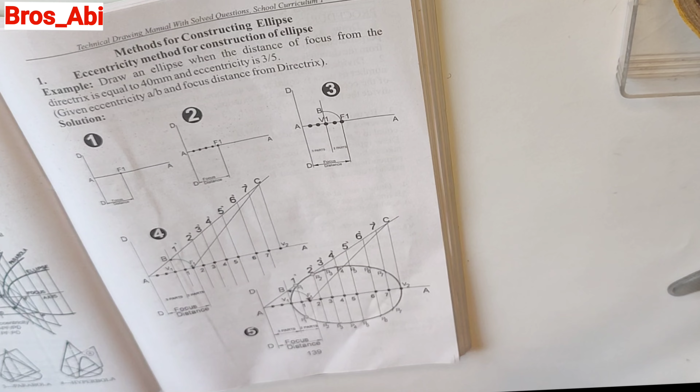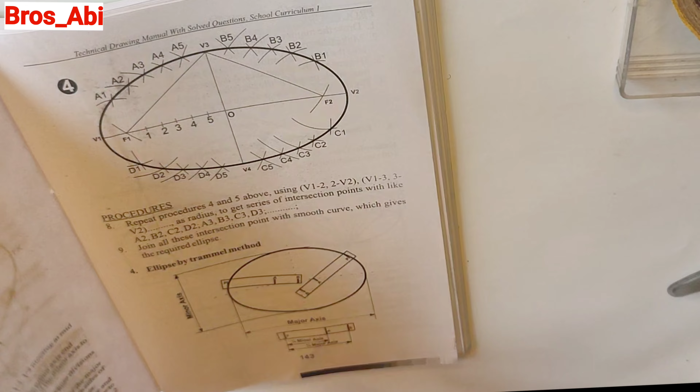All right, let's look at different methods of drawing an ellipse. I'll be using this technical drawing manual with Solved Questions, School Curriculum 1 by Ike Ajayi, looking at the eccentricity method, the concentric method, the ellipse method, focal point method, and trammel method. I'm going to start with eccentricity and trammel, then go through the others. After each video, I'll put a practical question. So now let's look at this.

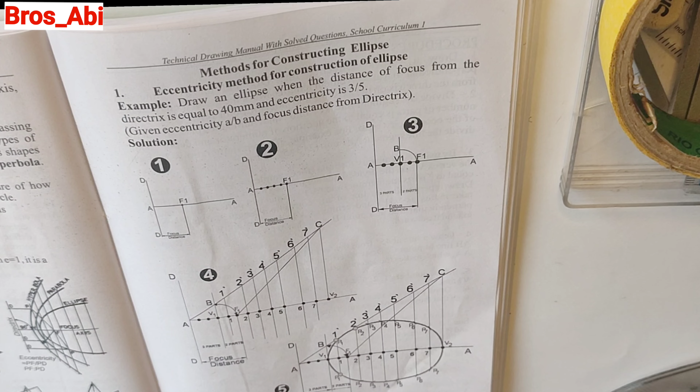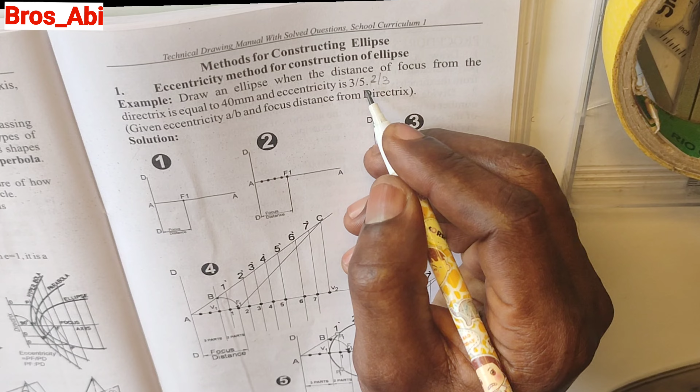It says draw an ellipse when the distance of focus from the directrix is equal to 40 millimeters and eccentricity is 2 over 3. So given eccentricity and focus distance from directrix, let's draw the ellipse.

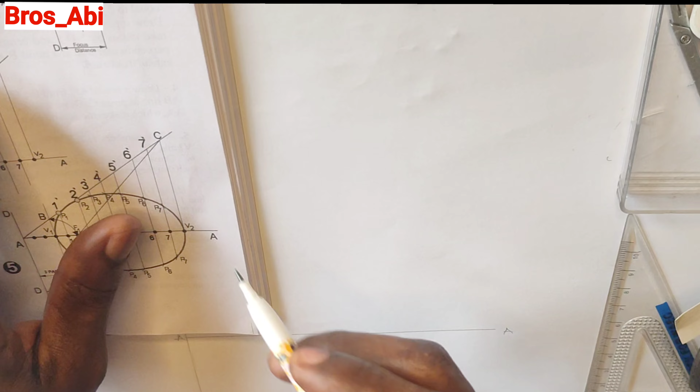The first step is to draw the axis AA. This is called the directrix - this line DD is the directrix. From this point toward this side is our axis. Now put the focal point. The focal point is 40 millimeters away from the directrix, so measure your 40 millimeters.

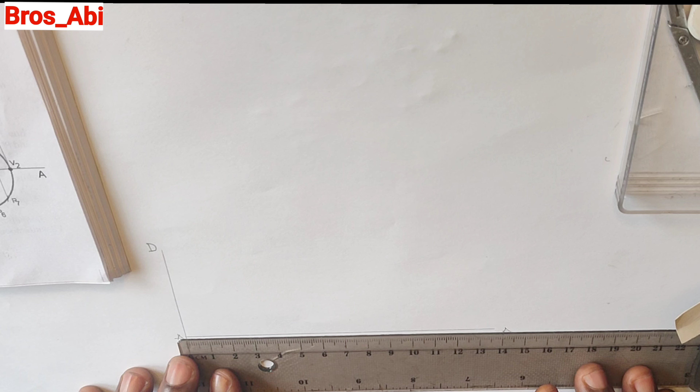I'll be drawing it with a 2D board and also without, using only our sketch pad. This is my focal point, F1. Next is to use our eccentricity to get our vertex point.

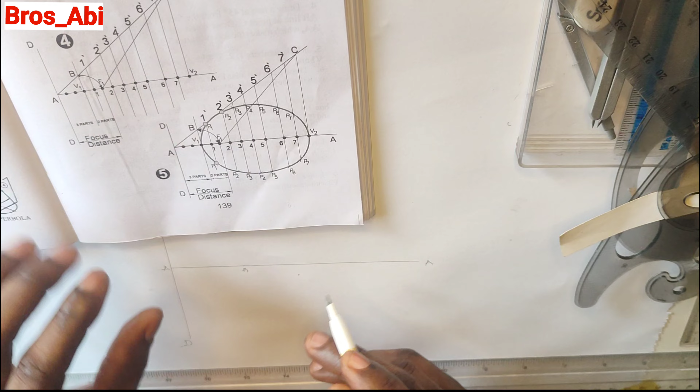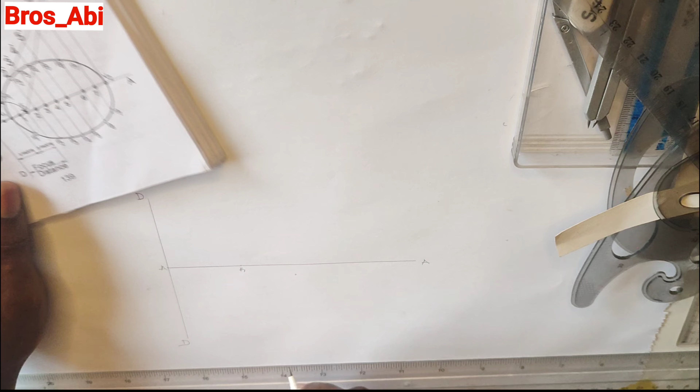Given that the eccentricity is 2 over 3, we add 2 plus 3, which is 5. So we divide from point A to F1 into 5 equal places. If from A to F1 is 40, dividing by 5 gives us 0.8. So I'll divide this from A to F, measuring 0.8 each time.

This is 1 - 0.8. The next is 1.6. After 1.6, we have 2.4. After 2.4, we have 3.2. After 3.2, then we have 4.0. We've divided that into 5 equal parts.

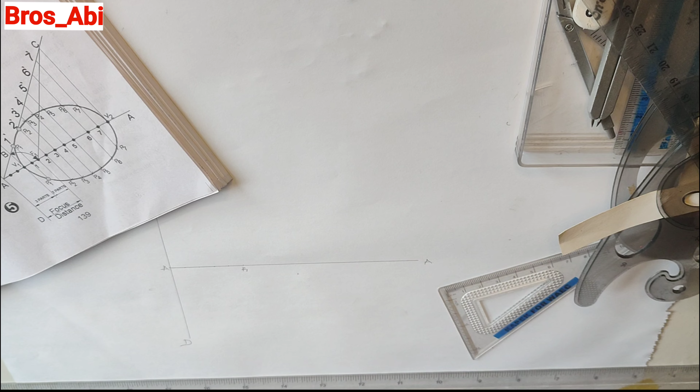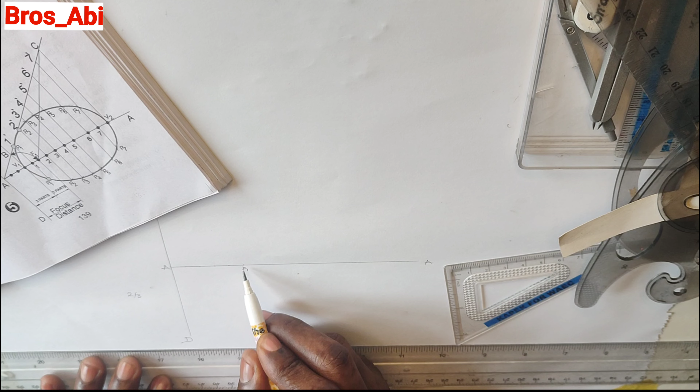So the next to do now is from A, we use the eccentricity of 2 over 3. The numerator will be the distance from F to the vertex, while the denominator will be the distance from A to the vertex. Now let's count 3 points towards this side - 1, 2, 3 - which is here. This is our V1, our vertex point: 3 points toward the directrix and 2 points toward the focal point.

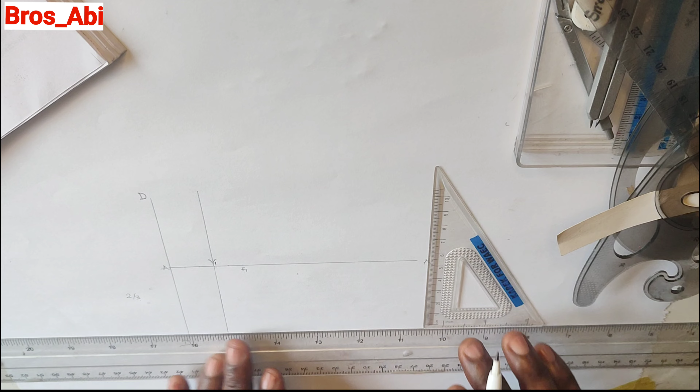With this now, the next step is to draw a vertical line across this vertex point - you can see me placing my set square on my T-square. Then we take our compass, put it at F, and take the distance from V. With this radius, I put it at V and mark.

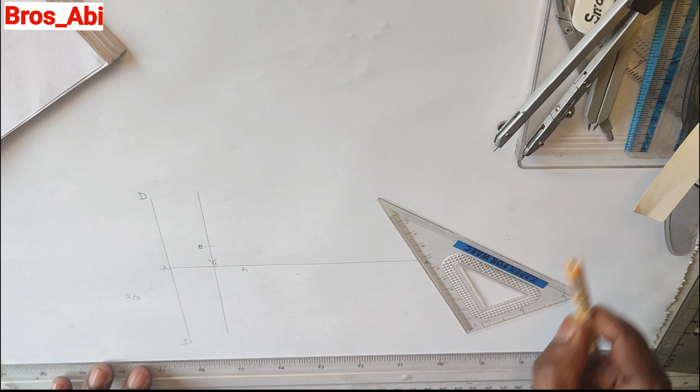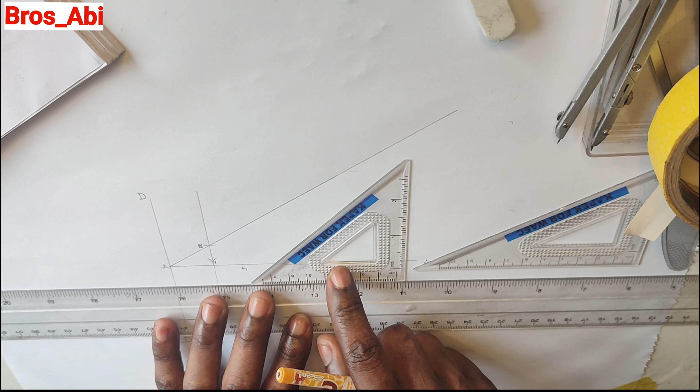Now what's next is to take a 45 degree set square and draw a line from focal point F1 at 45 degrees. I'll finish that with this.

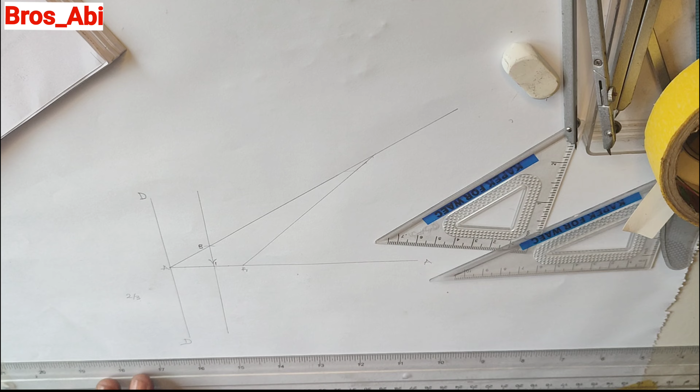So now where this line from the focal point is touching the line from point B, we're going to drop it down. We call this point V2 - vertex point 2. This is vertex point 1.

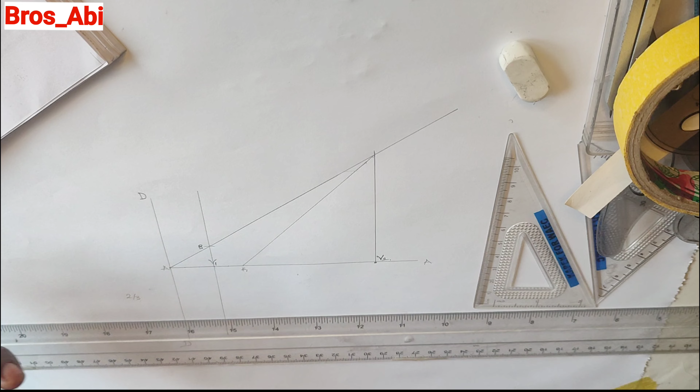So what we'll do next is from vertex point 1 to vertex point 2, we'll divide into different numbers - it might be equal, it might be different dimensions. From V1, my dimension is 8.9, so I can use 1, use 2.5, use 1 again, randomly 6, 7, and so on like this. I'm going to make from here to here be 1, so it's the same dimension as the first part. You can make it equal, or any part you want.

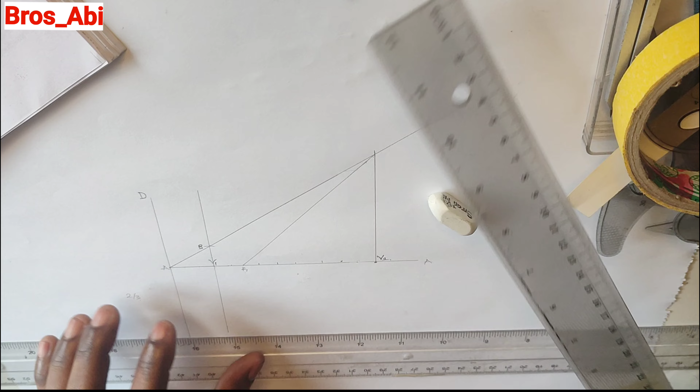So all you do now is from all those points, put a vertical line, parallel. So now where these parallel lines cut this line A through B, we start labeling it: point 1, point 2, 3, 4, 5, 6, 7.

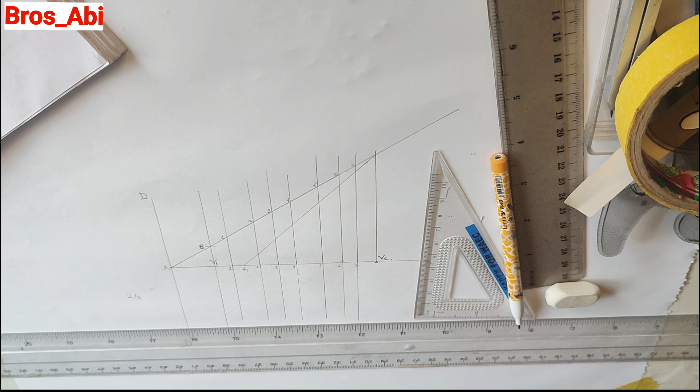What we're now going to do next is take our compass, put it at point 1, go to 1. Then come to the focal point, mark here. Then put it at point 2, go 2 to 2, come to focal point, mark. Put it at 3, go 3 to 3, put it at focal point, mark. Put it at 4.

Come to focal point, mark. Put it at 5, extend to 5, put it at focal point, mark. Put it at 6, extend to 6, put at the focal point, mark. Put at 7, extend to 7, put at F1, mark. So those are the points for our ellipse.

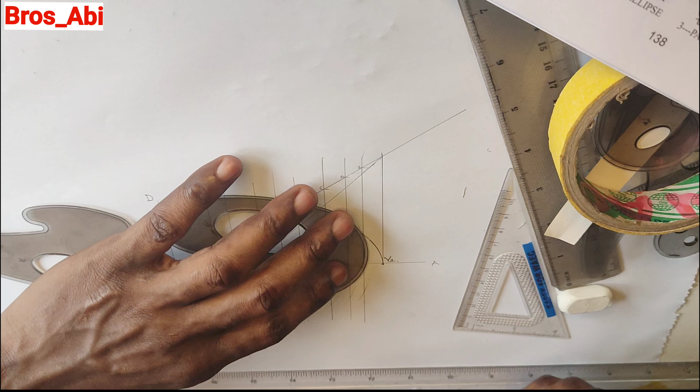So now we'll get our French curve to join all the points together. I think I found the best part from here to here - even if it's the first two, take it first. You see this part I use for this section, I'm going to bring it down here to also do this part. Let me take it to this part also, and see what I can achieve here.

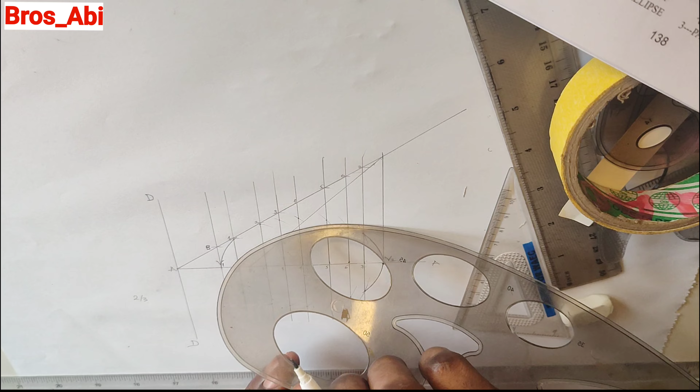This one, two, okay, it goes like this. And turn it to the other side like this. This part, let me see what I can obtain here. Okay, no, it won't go like that. Okay, I think it would go like this. Perfect, this two is good. So it's good to go. So I'm bringing it to the other side, this part.

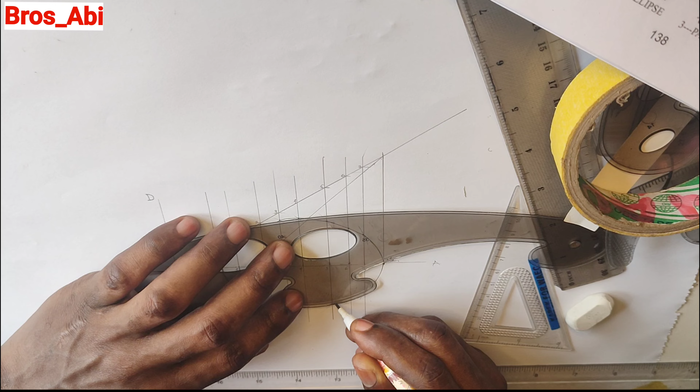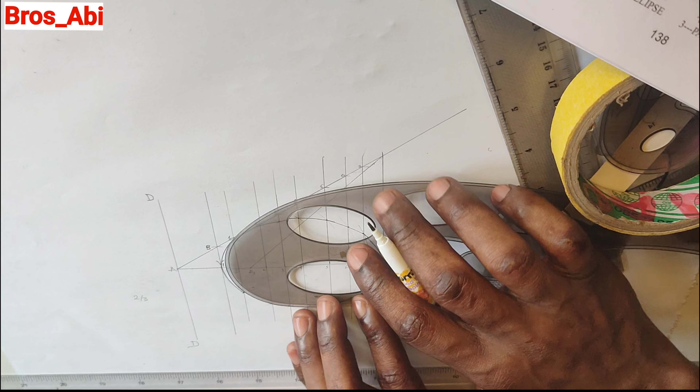Okay, seems something like this will be better. Good. So just turn it to the other side. Good, so let's see this part. Okay, this part also goes well from here like this to this part. Okay, so meaning we take it down like this, and here we go. Beautiful, now here is our ellipse using eccentricity method.

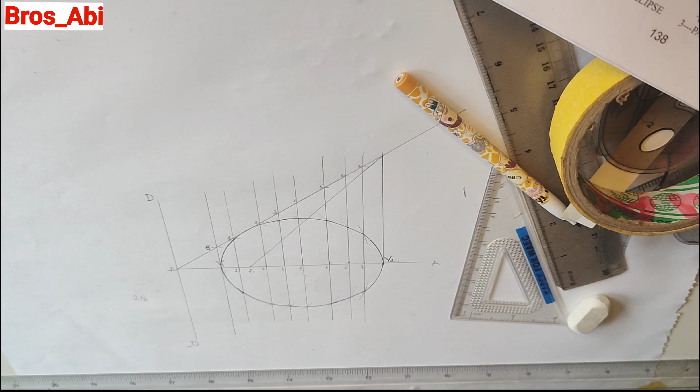All right, so now the next is for me to use set squares and other drawing equipment. If you're having only set squares, you can also use your set squares alone without your T-square to draw your ellipse.

So here we go. Now using eccentricity method, with just our compass and pencil, protractor, ruler, and set squares, we're going to draw the eccentricity method for construction of ellipse.

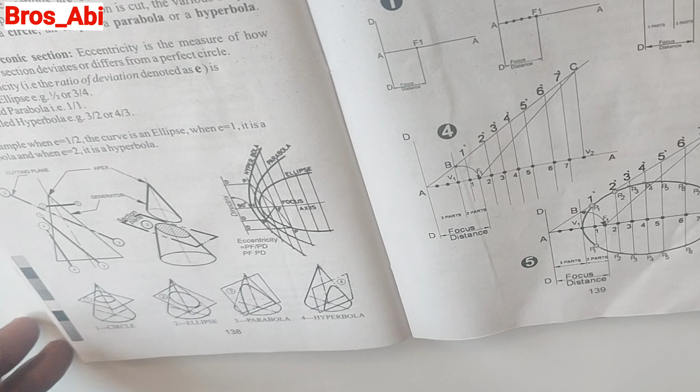All right, so what we do is now, at least, put your protractor to see that your ruler is well placed. As it is like this, it looks well placed like this. All right, okay, it looks well placed, and whichever way you place it will keep being on track.

So now draw your horizontal line, then your axis. Now you see this point here, 0, 90, set it on my straight line. My vertical line will be 90 degrees to the horizontal line. All right, so I can put my ruler like this and draw.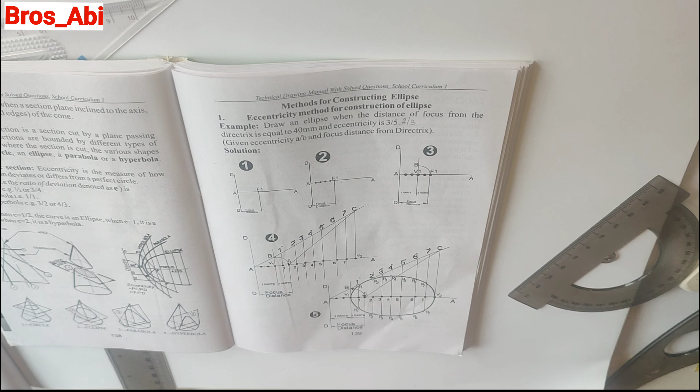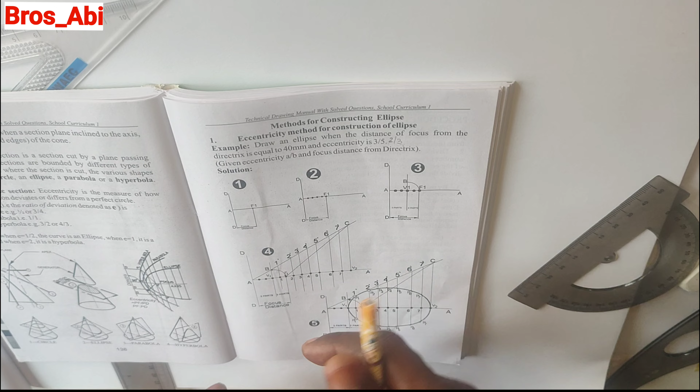Okay, good, I label these as my directrix, and here to here as this. The question says draw an ellipse when the distance of focus from the directrix is equal to 40 millimeter and eccentricity is 2 over 3. I said we are not using 3 over 5, because, okay, we can even use 3 over 5 at this point now. If we want to use 3 over 5, we'll still arrive at the same answer, so let's use 3 over 5.

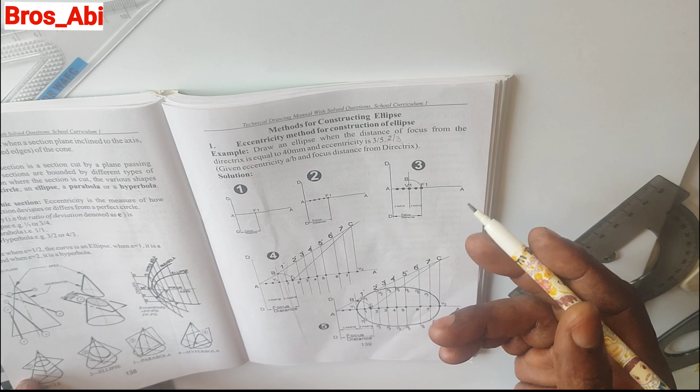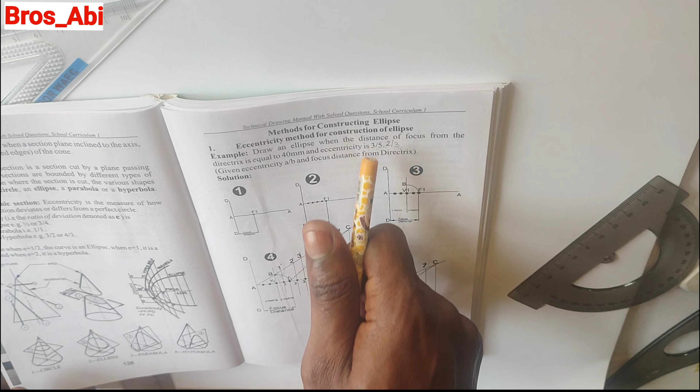Let's look at what the textbook, the value that the textbook gave, but that was not the value depicted in the drawing here. You can see from here, 1, 2, 3, 4, 5. They use 5, which is meant to be 8 if they are to use this ratio. So let's use ratio 8 now, 3 over 5, that's 3 over 5, which is going to be 8 when you add it together. So that will be 8.

So that means I'm taking my focal point 40, then I'm dividing into 8. That means I'll be using 5, 1, 2, 3, 4, that is 40 into 8 places, 5, 6, 7, 8, that's 1, 2, 3, 4, 5, 6, 7, 8.

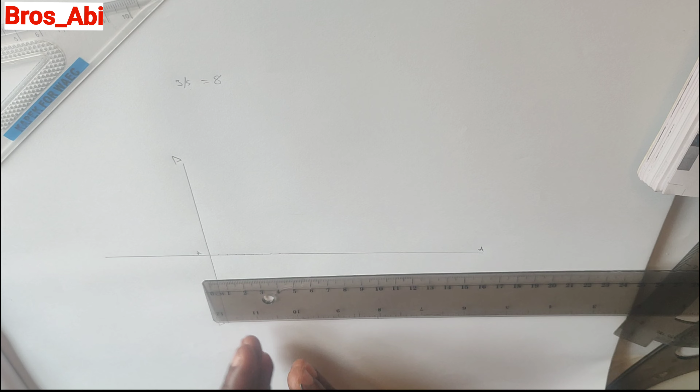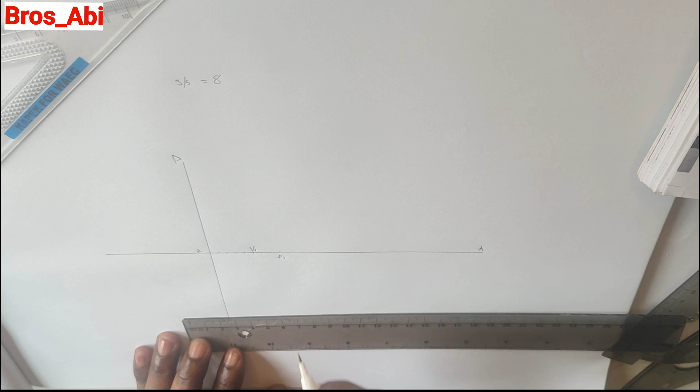And okay, now what next to do is draw a vertical line. Remember, we used to draw a vertical line. I put the 0 line on the straight line on the directrix. Also make sure that this straight line is also on the line here, and I put my ruler beneath. So and I remove this.

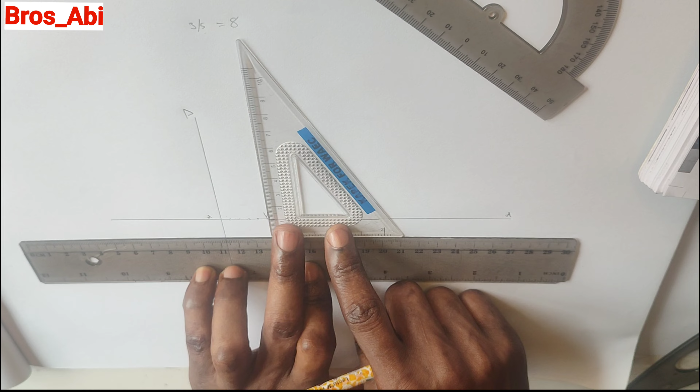So I'm not going to put this part now to draw line. I'm supposed to extend this line downward. So you can still put it again, 0 on this line, 90 degrees underneath.

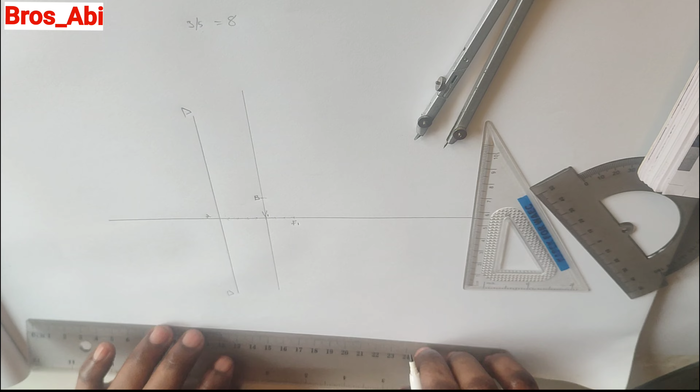Good, so now what next is to take the radius of F to V. Mark maybe here as point B. So now what we're now going to do next is to take a line from point B. As you can see, BV is equal to V1 F1. So from here through here, draw a straight line.

Okay, also from focal point, use your 45-degree set square to draw a straight line. So at this point, I'm going to check my okay, so I'm going to put this here like this and then draw. So then from that point also, I will drop it down from here. This is my V2, that vertex point, which is gotten through 45-degree to this side from the focal point.

What we are now going to do is, so as I've said, I'm going to divide this part into several halves. So I'm going to be using one, I'm going to be using the compass, 2, 3, 4. Now, but from here, I want to have also 1. I'm using point 1 from this side to this side. Then also from here, I use point 1. I mean, you use your call, French curve, to make it easier for me.

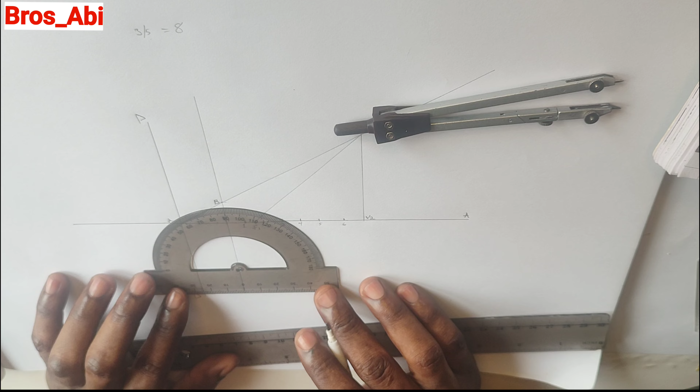Now this line, this division between V1 and V2, I said it can be random, it's not a must to be equal. When these parallel lines are touching this line AB, we label it 1, 2, 3, 4, 5, 6.

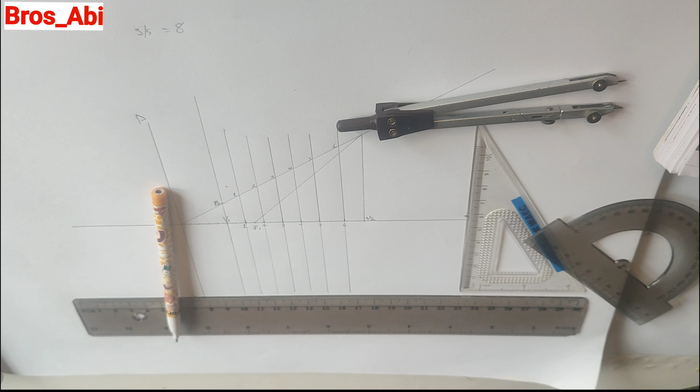What next is to take our compass, then we measure from 1 to this point here. Good, so we put it on F, we will mark 1, 1. Put it on 2, extend to 2. So we put it on focal point and we mark.

Okay, point, point, point, point, okay. Put it on 3. Okay, this is 2, put it on F1, mark. Mark, put it on 4.

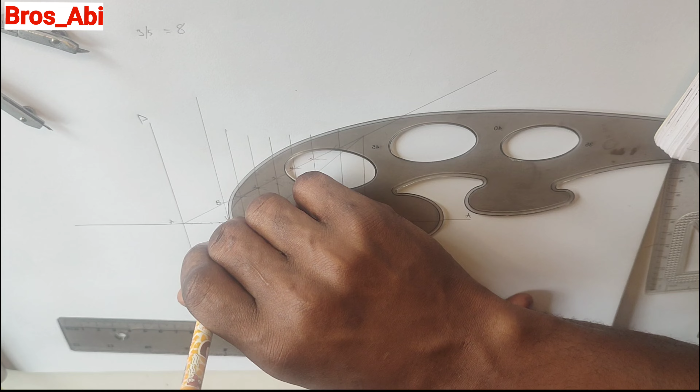Alright, what next is to join these curves together. Beautiful, and that's all, here's our ellipse using eccentricity method.